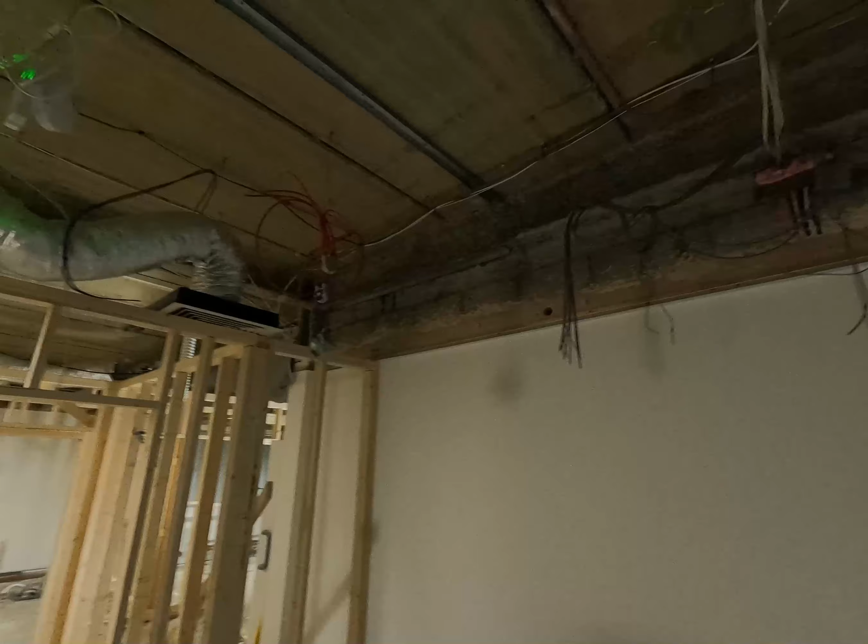So this is what we got, this is the main reception room. We've got cables absolutely everywhere at the moment, but this is reception. You can see up on the ceiling, there's going to be a suspended ceiling in here.

We've got some rooms in here, just a bit of my kit there, packing up the last few things. This is the waiting room. We're going to have some sort of sockets, I think that's going to be like a drinks machine there as well.

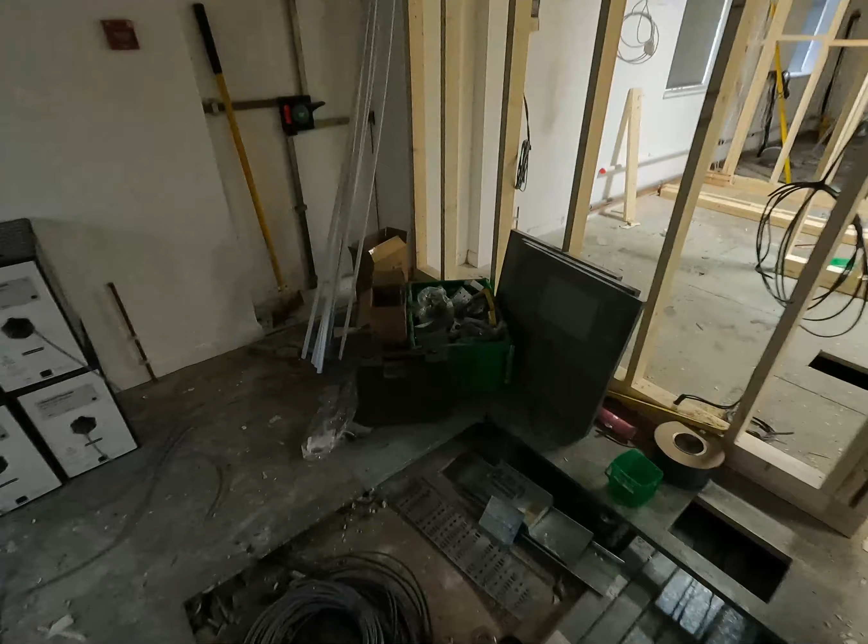This is just some of my first fix kit. I've got some cables here, ready to go in, just sort of shut here. So this is like the ring main, it will link these up.

They've also got data points and stuff. There's some tray working bits, that was existing, I've reused it. It's not amazing, but something.

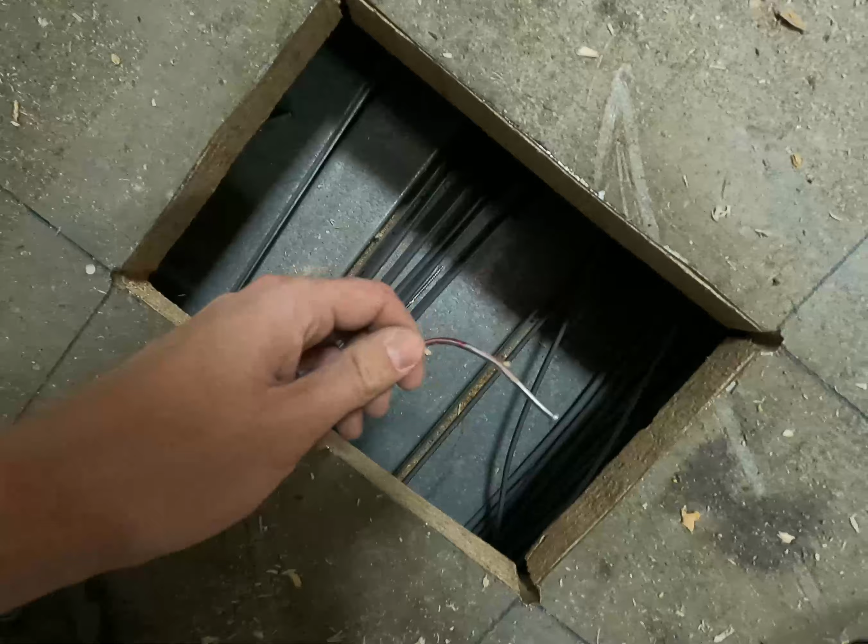Oh yeah, look, couple of nails and screws on the cables, we'll get rid of them. But yeah, we've barely got any light here. This is the old suspended ceiling lights, we've just sort of rested them about, you can see a couple up there.

And then these are the treatment rooms, so we've got 6 in total. So obviously light switch as you come in, this is going to be like a wall mounted screen for something.

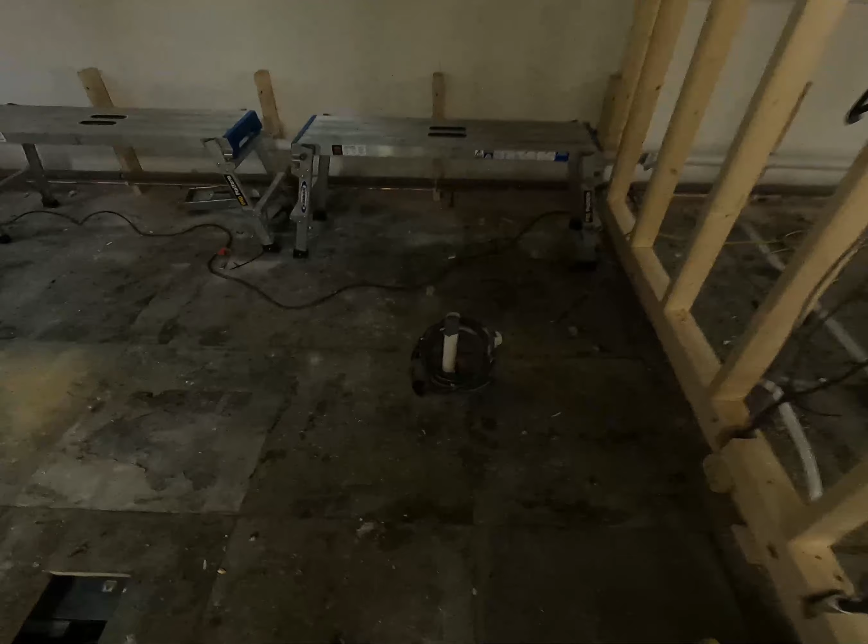Down here, here's the actual chair. So we've got some conduits and bits like that in ready. That's the actual foot of the chair. So you will sit here, lean back here.

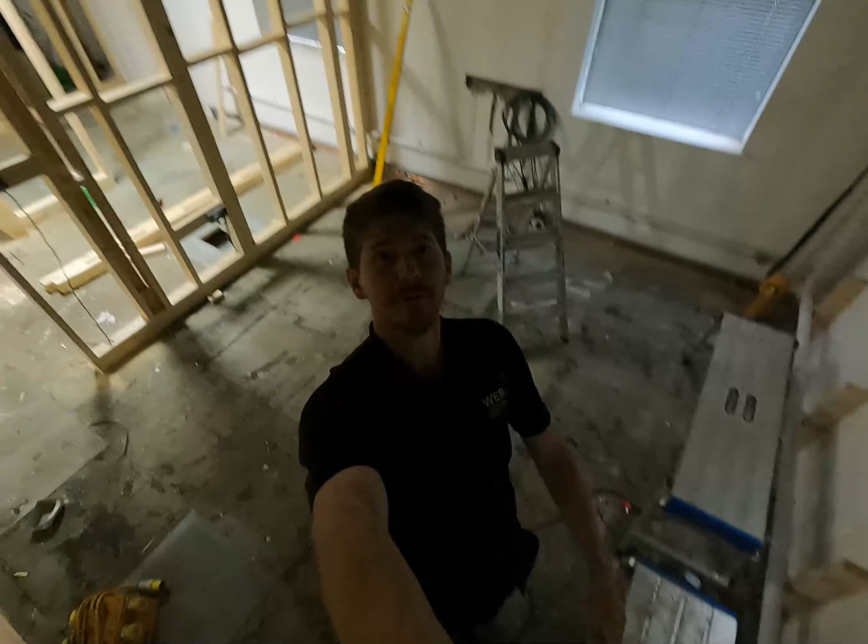I don't know if I've shown that very well. Oh, sort of like that. I'll show you a quick little - so that's where your feet would be, and then that's your head, and then obviously the chair's next to it.

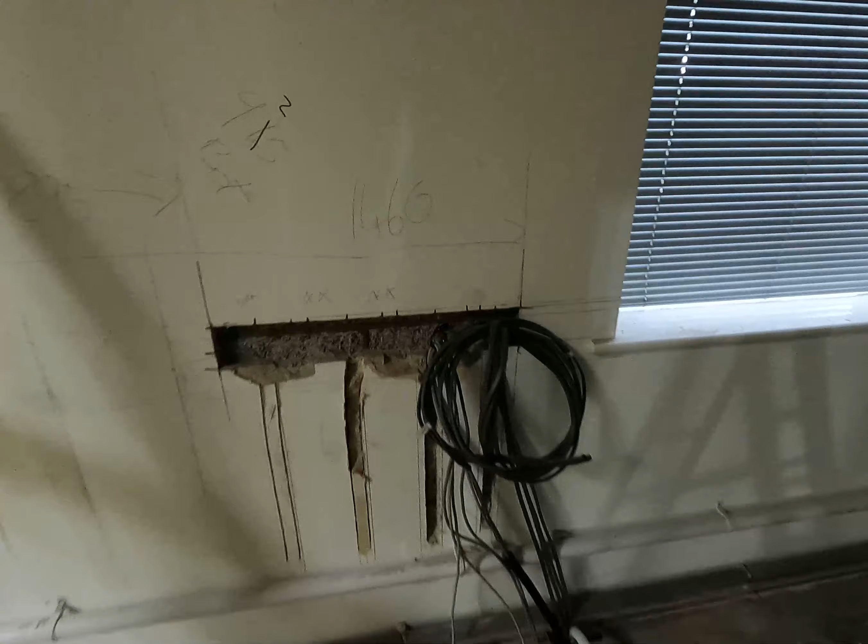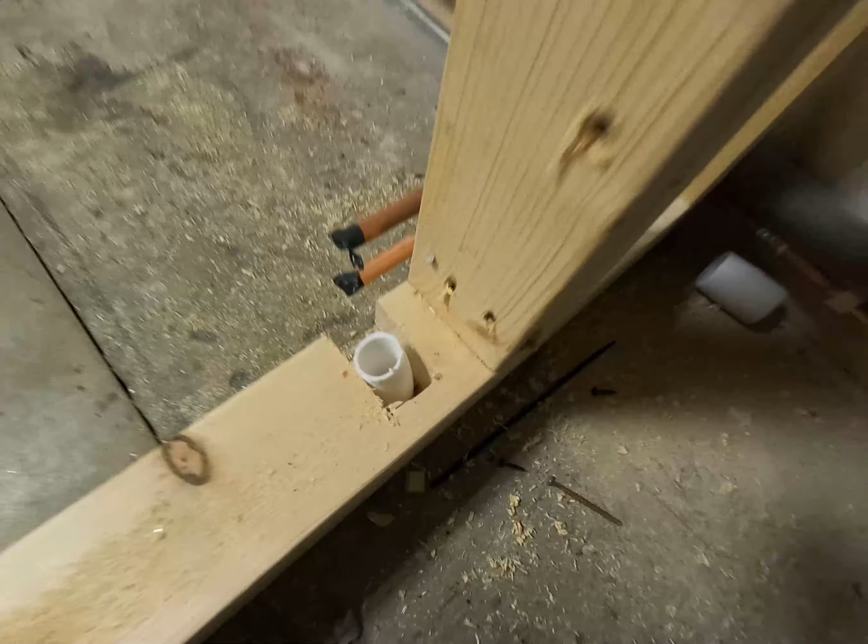I made a bit of a mistake. So I had all this chopped out with boxes in ready to go, and then I was told that the people who make the cabinets will actually cut the boxes out for me in like a little void in there. So I didn't need to do all of that, but these cables were originally going this side. You can see that on this wall, but they got moved, so hence the extra length on those. But you can see all my workings out at the top there.

Yeah, this is sort of the main passageway. We've got the X-ray room, this has literally just been ripped apart today, so you can see I've got cables in the middle of the floor and coils on this wall.

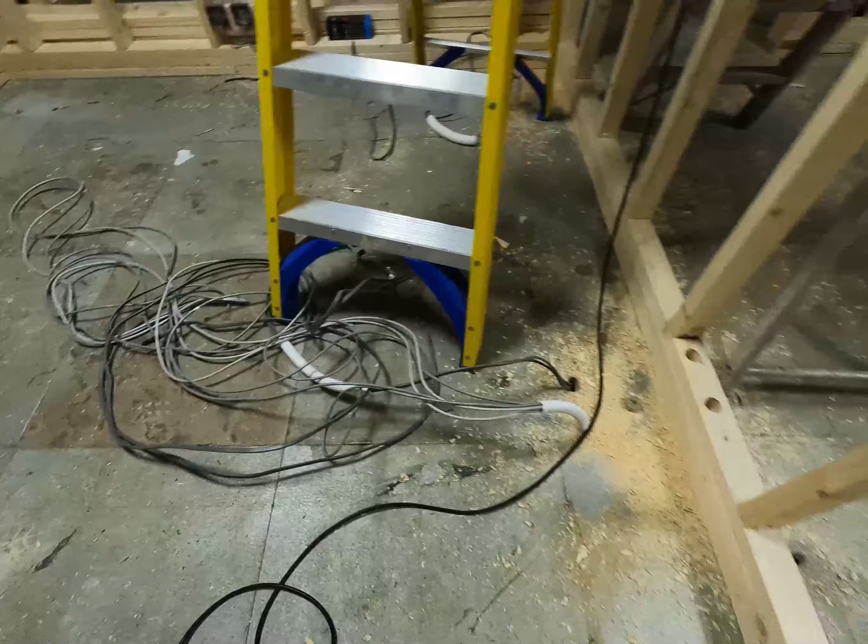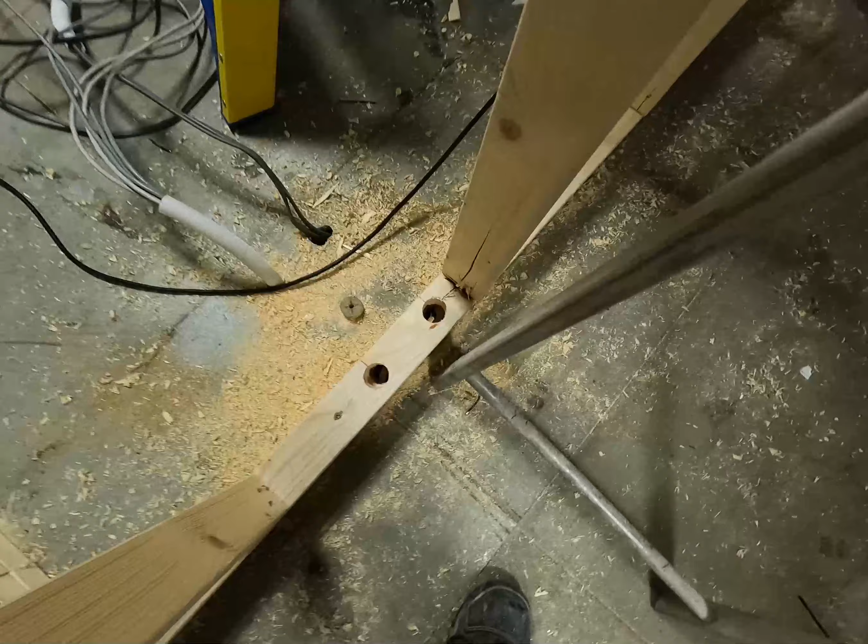You can see they've had to extend it, so they've extended it over to here. So my cables were, you can just see, they were in the stud work, and now I've drilled the holes ready, so they've just got to move over because the machine wouldn't fit in. So I think this still works out okay, the bits I've done here.

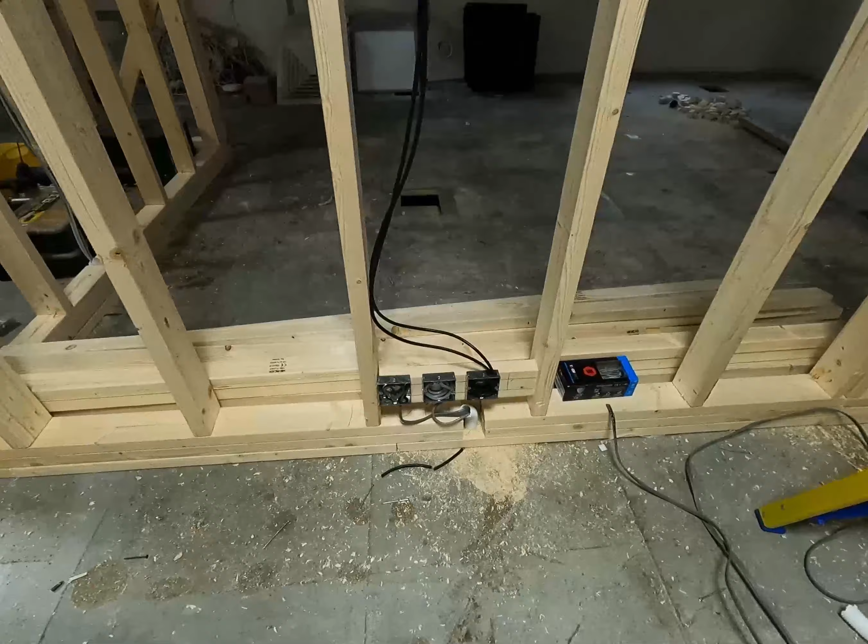So in here we've got our main supply to the X-ray machine. This is just on a fused spur. We've got a couple of communication cables, one which is a link to the computer, and the other is a link to the switch. So when you press the beep beep, that clicks it, sends the X-ray from outside.

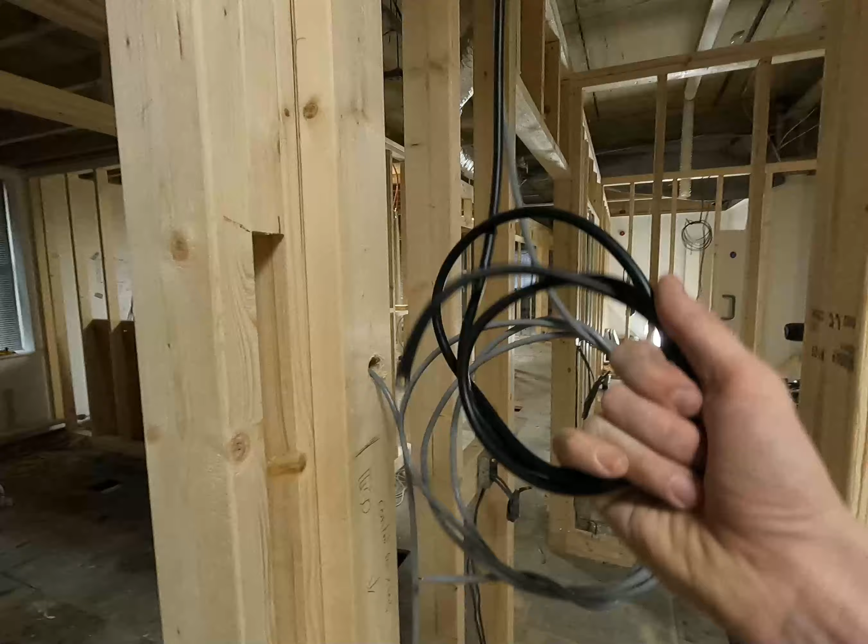The isolators have to be on the outside of the X-ray room, that's just in case something was to go wrong, you can isolate it from the outside and you haven't got to go inside. 2 communication cables, that's because there's 2 X-ray machines. And then just a light switch.

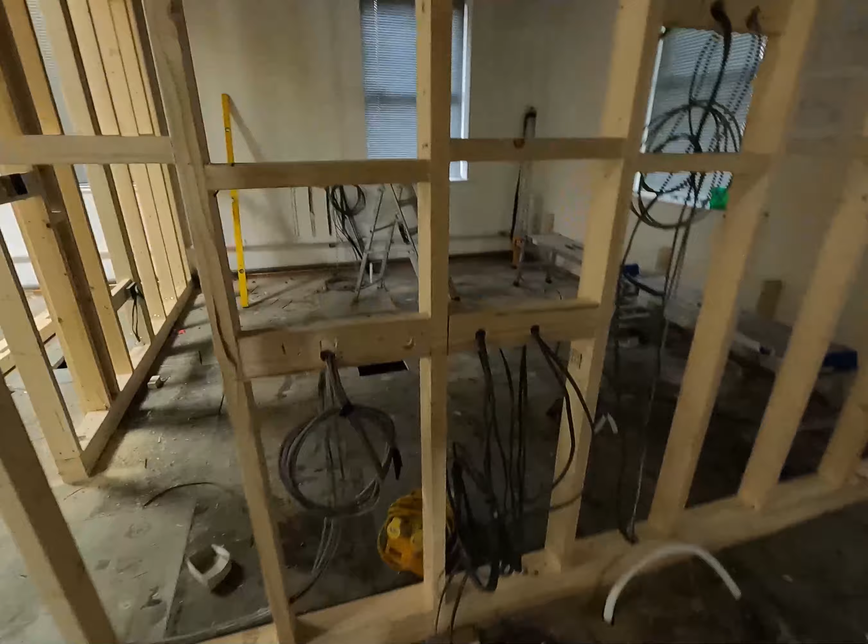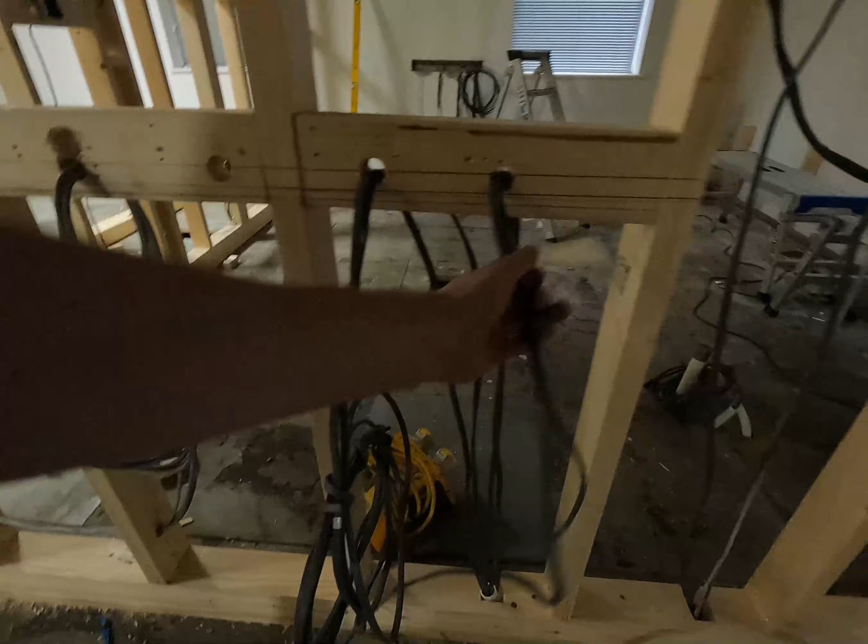Everything at the moment's been left really long, only because the plans aren't definite yet. So it's just copy and paste, we've got the same again. These are all boxed up, you can see all my boxes that I'd already screwed up, but we've just ripped it out. We've got ring main, 4 data cables, fused spur, and the load side.

Here's a little brief overview of the plan. So this is what I get given. You can see I've taken you around here, we've had a look in here, that's the first treatment room I showed you. We're now stood in here looking at this one. So you can see we've got sockets, 4 data points.

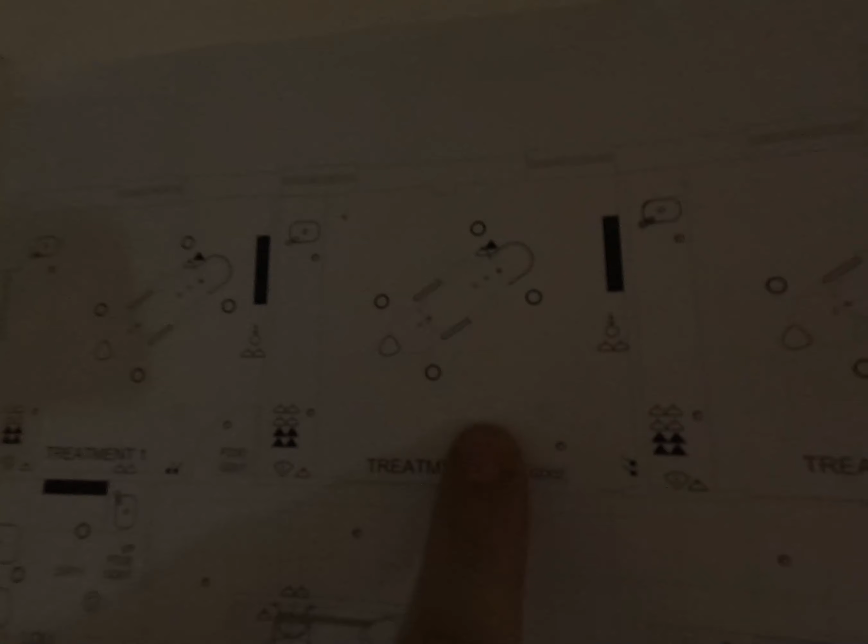In the actual chairs we've got data point and socket, but there's been extras on it. And then we've got HDMI point and double socket, that's for a monitor. And then we're back to the switches on this side, and then that's the next room. It's literally just copy and paste, there is 6 of them.

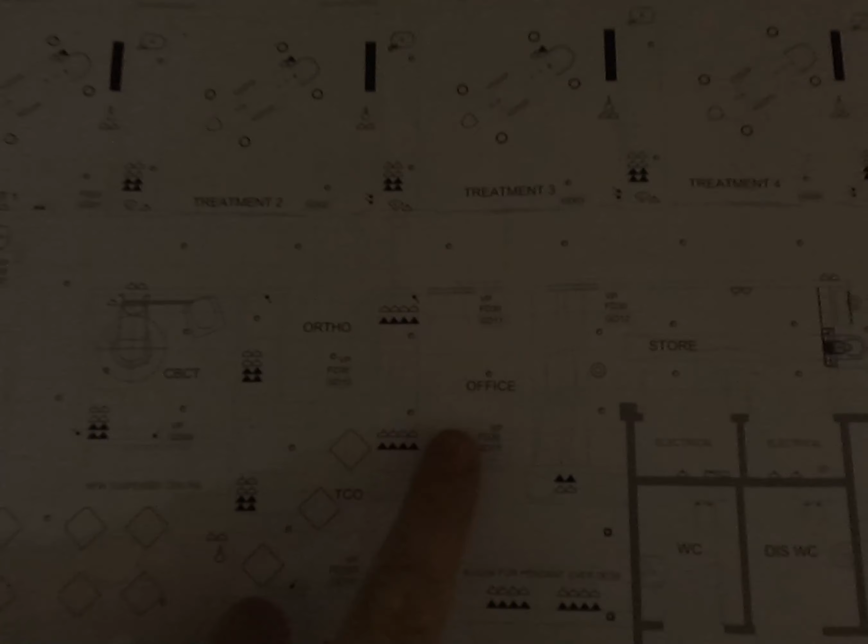And then we've got the X-ray room, CBCT, don't know what it means, Ortho again, don't know if that's focusing very well, sorry. Then we've got office, storeroom, that's got our fuse board and other bits in there. That's another fuse board, but I think that's communal. Toilet, shower, lab, and then staff room, and then another little office down here.

So we'll take a walk down through. This room's, I think this is...